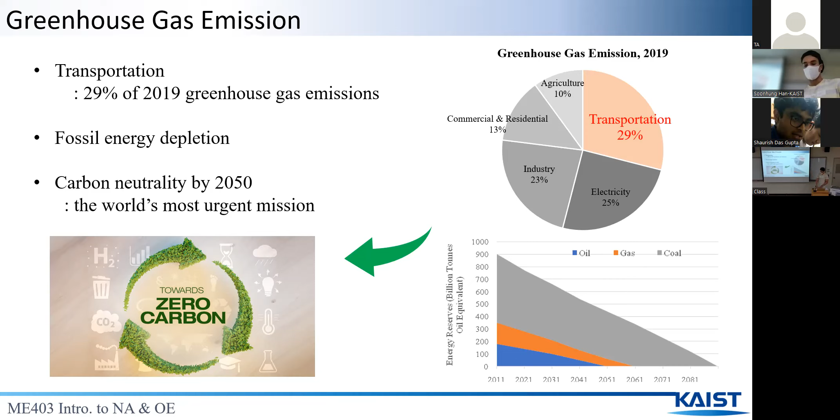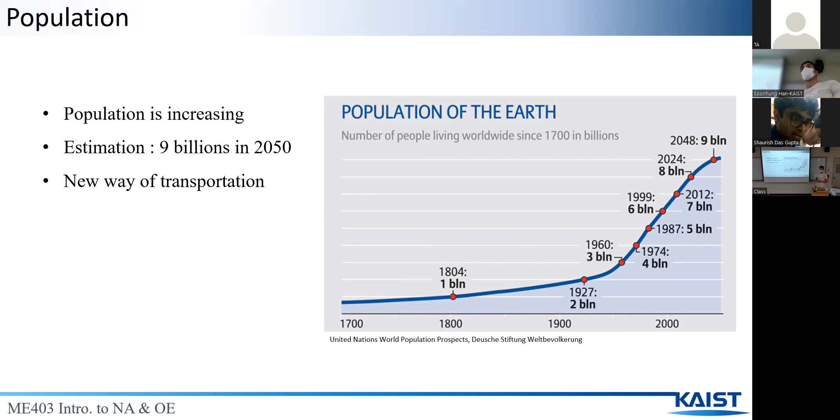Secondly, the population of Earth is increasing, and according to studies, it won't stop, and in 2050 it will reach almost 9 billion inhabitants. So we will need more transportation because there will be more people, more flow of people. So we will need a new way of transportation for these people.

What is Hyperloop? In 2013, Elon Musk presented his new Hyperloop project. Why could it suit the needs that we talked about before, the population increasing and the greenhouse gas emission? First, it has ultra high speed transportation, for passengers and cargo. So for passengers, we have a new way of transportation, and it will create more transportation for the people.

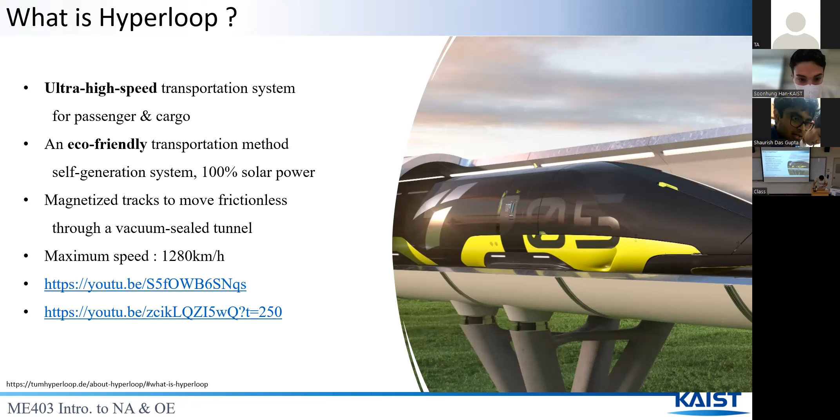Secondly, it is an eco-friendly transportation because it uses renewable energies like solar power. I will show you a little video to explain more. This link. Next up. Yes.

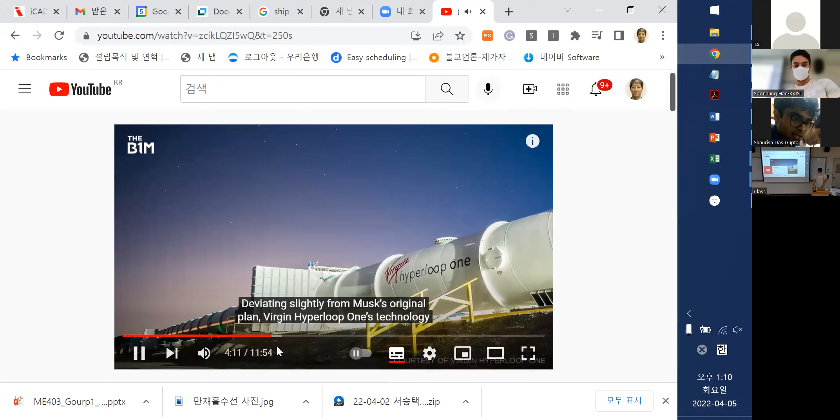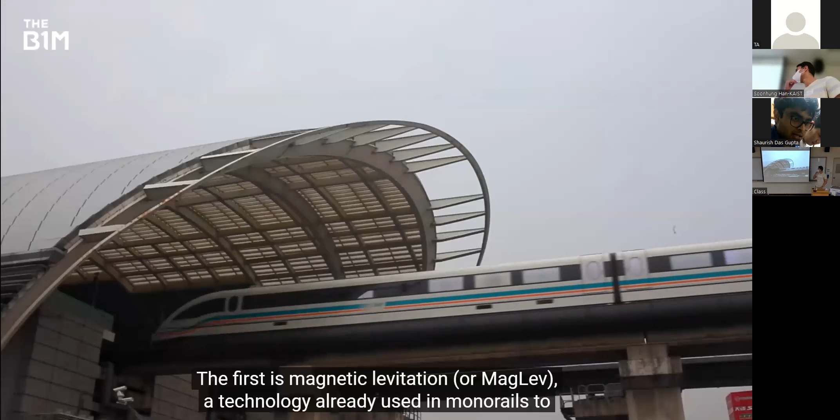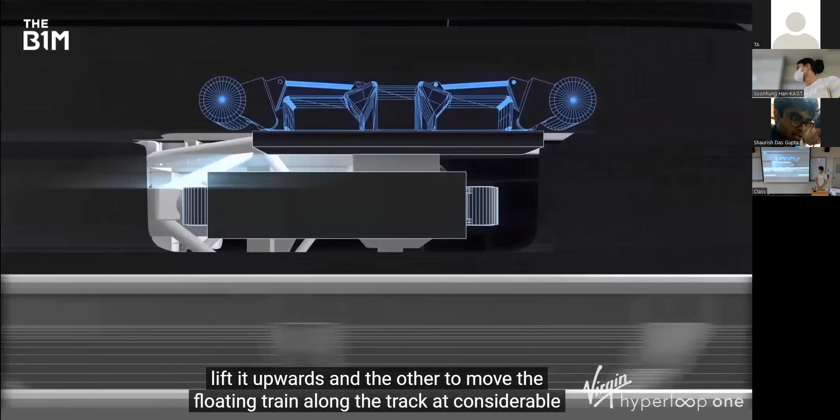Deviating slightly from Musk's original plan, Virgin Hyperloop One's technology combines two basic principles. The first is magnetic levitation, or maglev, a technology already used in monorails to lift the passenger pods and move them along their rails. Magnetic levitation uses two sets of magnets, one to repel the train from the track and lift it upwards, and the other to move the floating train along the track at considerable speed with reduced friction.

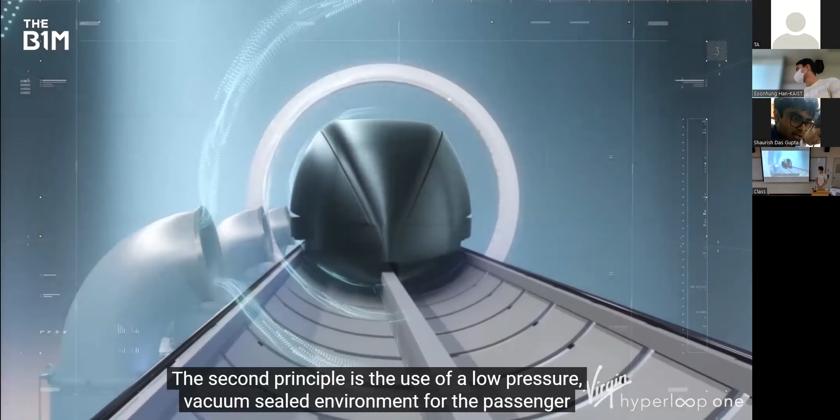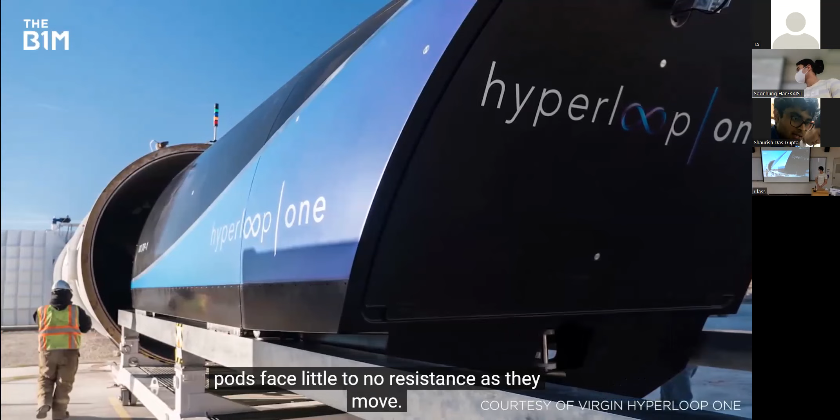The second principle is the use of a low-pressure, vacuum-sealed environment for the passenger pods to travel through. By removing most of the air from the tubes and having no contact with the ground, the pods face little to no resistance as they move. Air pressures inside the tube are equivalent to flying 200,000 feet above sea level. Such an environment

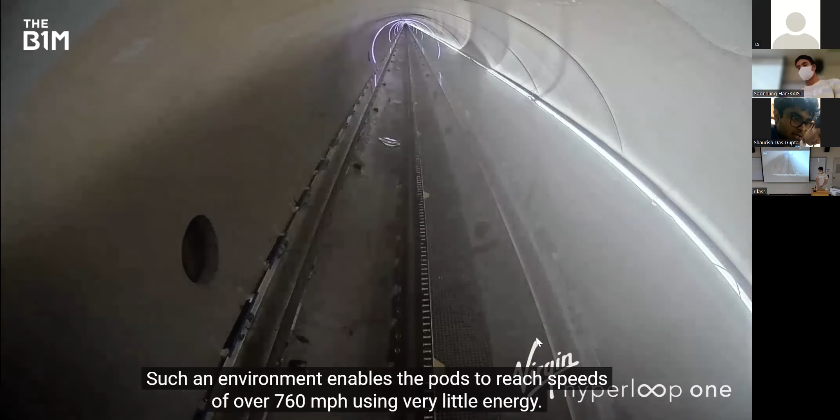You saw that it will eliminate the air resistance. So when you are in a car on the highway and you put your hand out and you feel all of the resistance, the force you have on your hand, you can imagine the amount of energy you could save by using this technology.

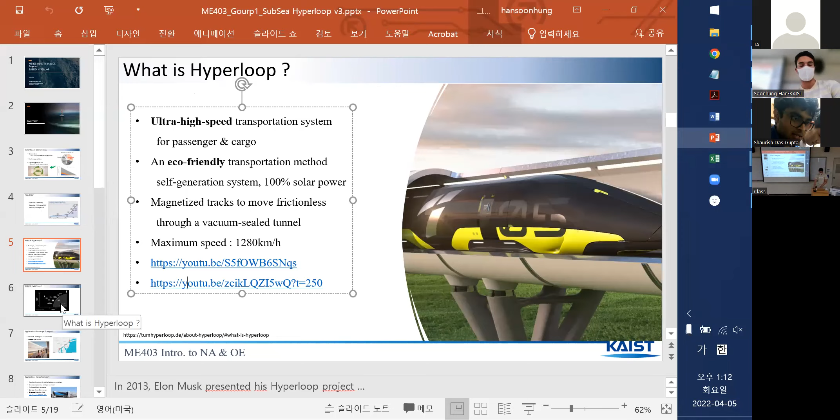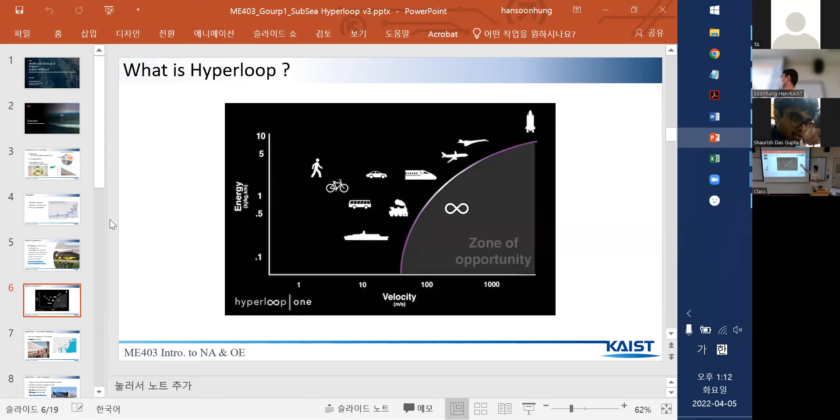The main goal of Hyperloop is to reach, as you can see, what's called the zone of opportunity, because every time a new way of transportation was created, it was faster, but it also used more energy. So there is all this zone that this project wants to reach.

As I said before, there are two applications. The first one is passenger transport. For example, one project is from Washington to New York, and it would take only 30 minutes, where a plane is currently taking 1 hour to 1 hour and 30 minutes. There are other projects around the world in Korea, USA, Dubai, Europe, India, and China.

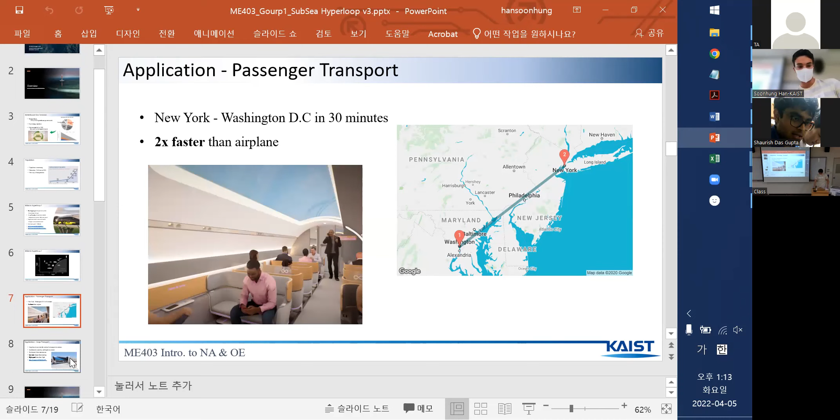The second application is cargo transport. Using cargo to transport merchandise was a revolution. So using this with the Hyperloop technology would allow us to reach new possibilities. For example, if a company orders a big amount of items that they need, the demand could be answered autonomously. So it could be very fast and we could save a lot of time.

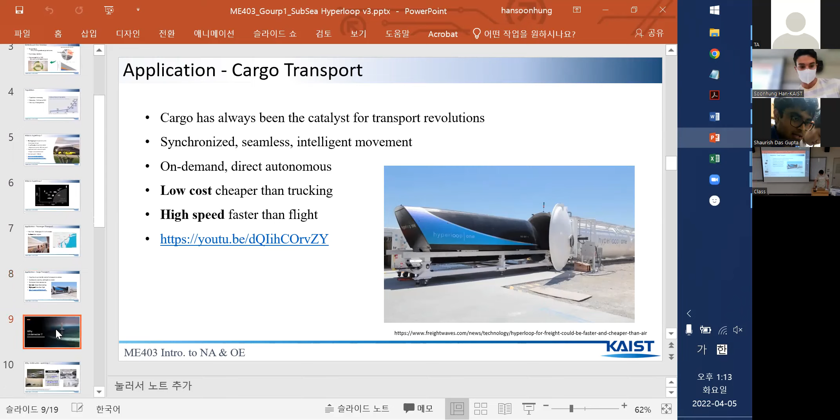Then why underwater? Our project is mainly to adapt the system underwater in the ocean. What would be interesting about adapting it? First, this is the next step on the two objectives we talked about before. For example, the greenhouse gas emissions.

Among transportation, there are not only cars and trains, but also ships and boats. So this is the next step to reduce carbon dioxide in the atmosphere. And secondly, to bypass the problems we have, for example, in airports or in ports. With the Hyperloop technology, it will save a lot of time also.

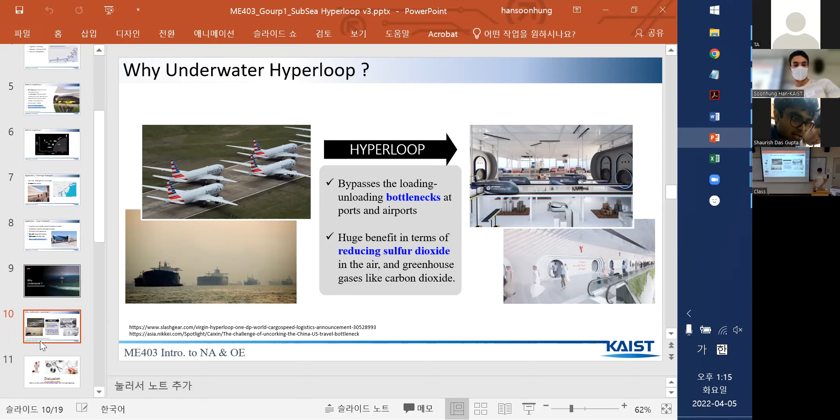Now, I would like to have a little discussion with you. According to what I said before and what you know, what do you think would be the main problems or engineering problems with underwater Hyperloop? Anyone have ideas? I have a question.

Yes. So, since the Hyperloop underwater will be a chamber that is vacuum sealed, there is no air in the chamber. One problem that I can see emerging is a problem of safety. If by any chance the Hyperloop does not work or it stops midway, do you have any idea of what kind of safety procedures one can follow? Because then they will need to work around the vacuum chamber, and they'll need to work around how people are gonna be extracted or people are gonna be sent to help them.

Yes, that is a question. I'm not going to answer it, but later we will talk about the main aspects about safety and the problems. Well, thank you for your idea.

Another question. You said that the Hyperloop chamber is close to vacuum, right? Whereas if you put it underwater, then the water pressure is very high. And the pressure difference between inside the Hyperloop itself and the water pressure from the outside is higher than it is above ground. So how can you deal with that? It represents, as you say, a more important difference. So this is another aspect that we will treat later.

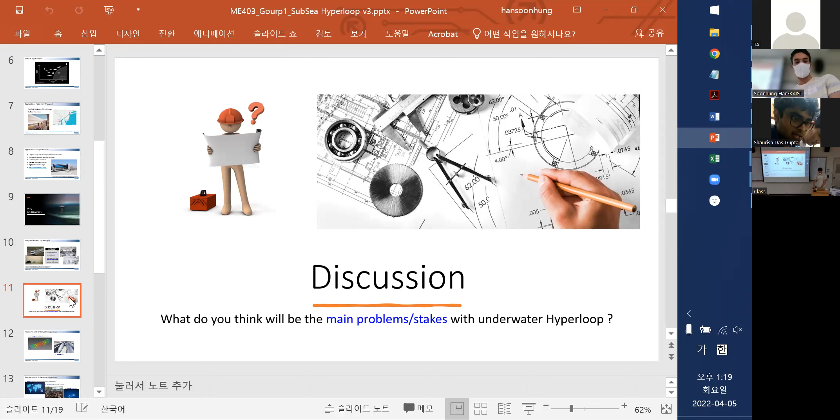I'm gonna move on to the next slide. So as you all said, there are a lot of problems that may occur. For example, the first one is the resistance of the structure, which is more complicated than on land, because it has other parameters, the pressure of the ocean, the forces of the waves. So it seems to be more complicated compared to the conventional Hyperloop. The second one is the vacuum hold, as was said, which has to be maintained even if it's underwater.

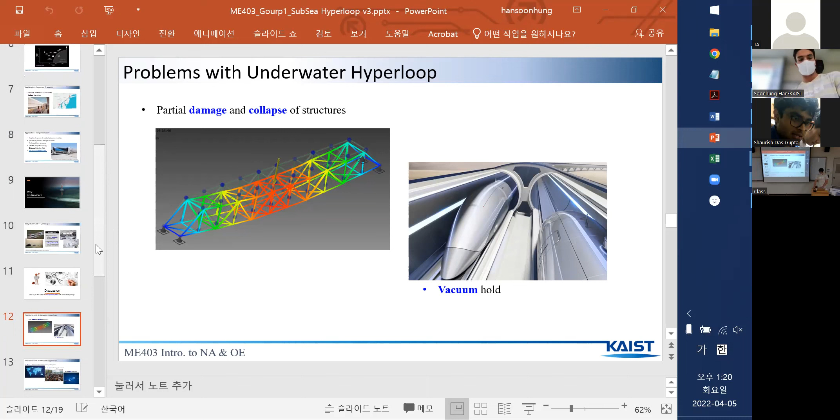Then one problem is related to oceans and seas. There are a lot of laws and regulations. For example, in international seas, you can't build what you want like that. You have to see with the other countries and international organizations. There are also laws about the protection of maritime environments. So you can't build everywhere on the ocean. So maybe these laws will have to be reviewed to allow companies to build Hyperloop underwater.

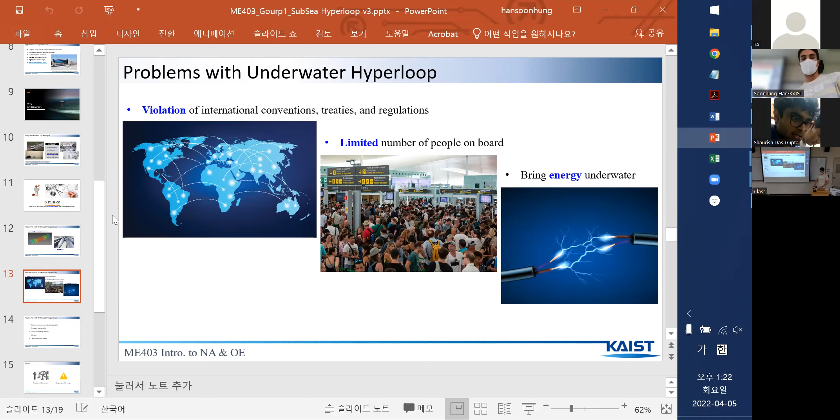I talked before about how this project was to help people have more ways of transportation. But for now, all of the prototypes have only a few people on board, 2 or 3. So the final Hyperloop will also have to solve this problem. And finally, it's an underwater system, so it will have to bring energy underwater. So will we use inland power plants, or renewable energy of the ocean? That is another question that will have to be answered.

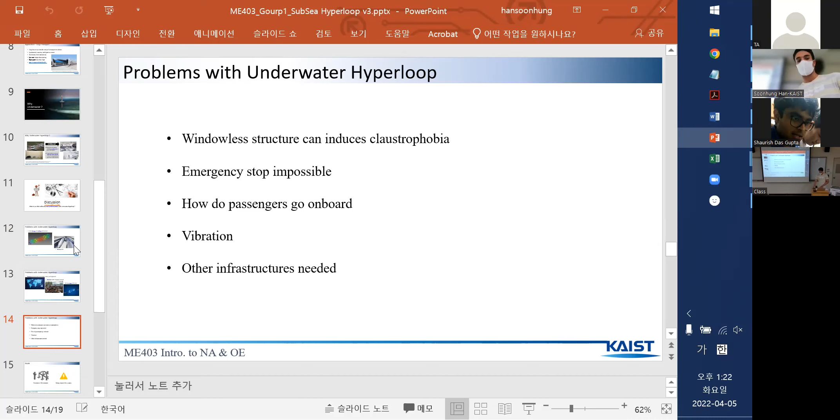There are other problems, like you said, claustrophobia. Another one: because of the high speed of the Hyperloop, an emergency stop is impossible. So it will be necessary to not have any obstacle in the way. We will need to see how the passengers will go on board, which infrastructure will be needed to do it, and also the vibration in the ocean.

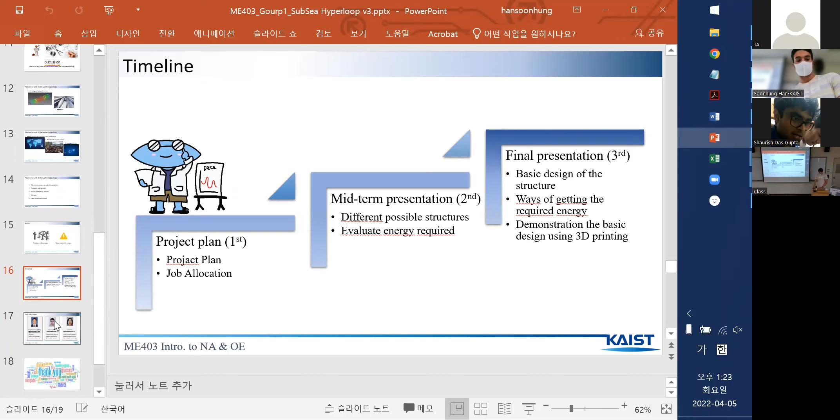Our group decided to focus on 2 main aspects. The first one is the resistance of the structure. As I said, there are a lot of forces and pressure compared to onshore, so it will be dealt with during this project. And the second one is everything related to the energy for a journey of the Hyperloop. This is the timeline. You can see how it is split for the different presentations. And this is our group with all of the different aspects each of us will treat. Thank you. If you have any questions or any other thoughts about it.

I really like the way you constructed the presentation. You really focused on the specific way to handle the problem of the transport system, which really seems to be future technology. So that was really good for your presentation. And I checked the 17th slide. I think this slide showed the roles after the first presentation.

Yes. So, can you briefly say what each of you has done for this presentation? What was your job in preparing this presentation? We first brainstormed our different ideas, and then we chose this one because we thought that it has a lot of different interesting aspects. Then we made general research about the first part of the presentation, what is the Hyperloop, and we then wanted to adapt it underwater to fit this class project.

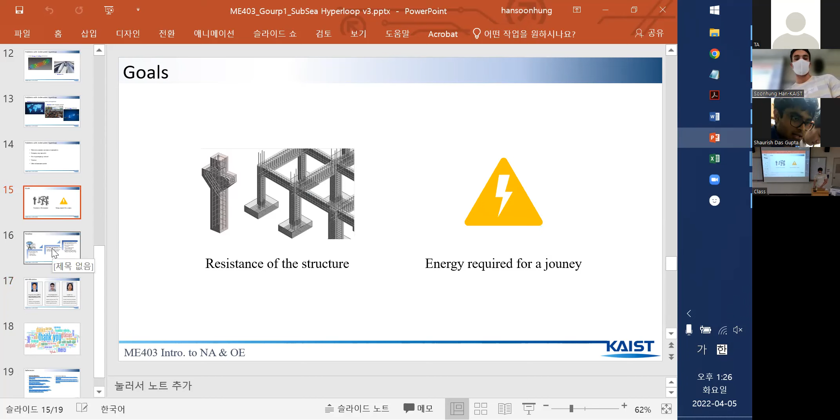Then we asked ourselves what would be the main problems with this technology, and then, as you can see on this slide, we chose two of them. We chose these two because we could use the lectures to answer these problems, and it seemed good and interesting for us to do it, and that's it.

Well, my lab researches structural systems, so I'm very curious about how to evaluate the resistance of structures. First, as you can see here, we saw that there were different possible structures. We already found three of them, different structures.

So the models will be adapted for every structure, and we will study the forces, the deformations, the stresses in the structure, and everything about pressure: how could it resist, how thick this has to be, and maybe which material may be used for it.

So do you guys have a plan to use structure simulation software like ANSYS? Apps like that? Yeah, maybe. Yeah. We'll calculate.

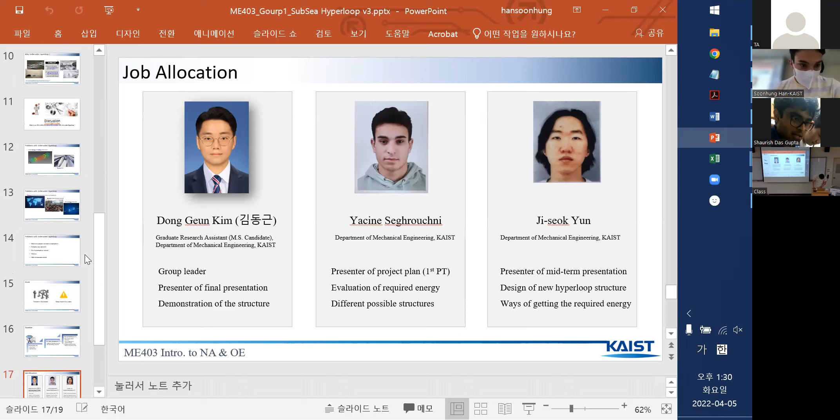I think you guys don't have to calculate temperature, because temperature doesn't transfer through a vacuum tunnel. So I think temperature is okay. For the external tunnel? The outer structure, it's water. No. The hyperloop is in a vacuum tunnel, and temperature couldn't transfer through vacuum. So temperature probably is okay.

But I talked about the external parts of the tunnel, so it's in contact with the water. But she was asking about the temperature inside the vacuum. I guess so. What I was saying was, are you thinking of providing insulation for the whole structure, or maybe just for the outer core? Maybe. We try not to focus on too many aspects, only these two, because we wanted to finish the project.

I have a comment also. One thing is, when I think about existing underwater tunnels, such as the Dover tunnel between England and France, that is an underwater tunnel already. And I know that the Dover tunnel is made of two floors. The upper level is for automotive cars, and the lower level is for trains. If I'm correct, then we can think of replacing that train part with Hyperloop. Then we don't worry about the pressure outside, because the pressure should be the same as the air inside the tunnel already there.

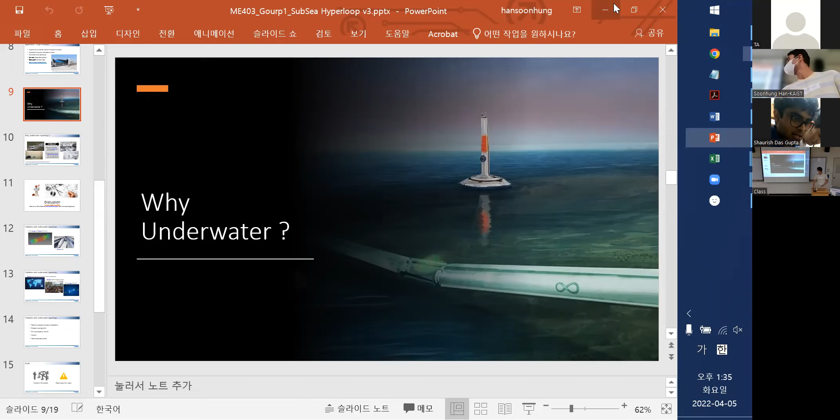All right, thank you. Thank you. All right, continue, please.